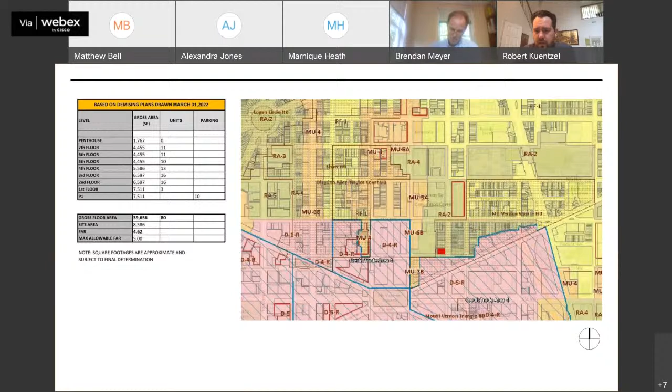The site is located in this little red square down here in the Mount Vernon Square Historic District. There was also the historic building and the non-historic additions, including the non-historic bay window addition on the corner of 6th and L.

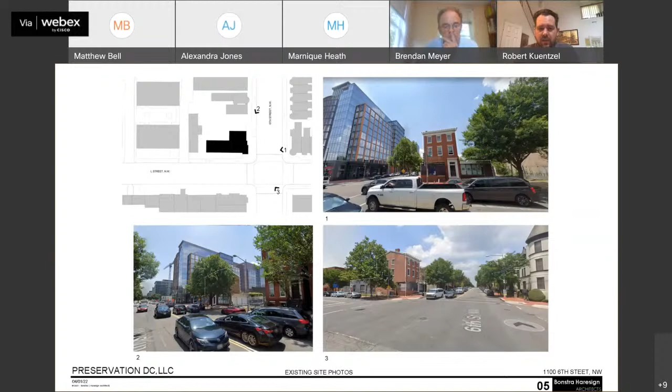Here are some pictures of the context which we were studying so that we could get a better idea of how to more seamlessly fit into and be compatible with the existing context. There's very large scale modern development just to the south with the office building across the street, as well as further down south with the 10 and 11-story apartment buildings. Further north as well as east, we have a lot of historic existing row houses.

The current state of the existing building has been cleaned up and preserved. What we will be doing is trying to take that back up to the best level possible so that we can preserve the historic building, including removing this non-historic corner bay so that we can bring it back to its original state, and removing the non-historic single-story additions here.

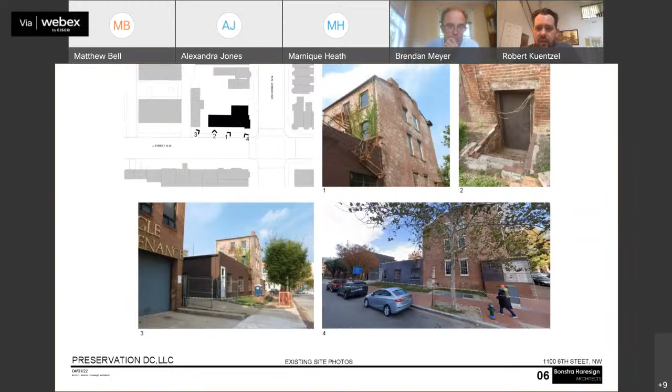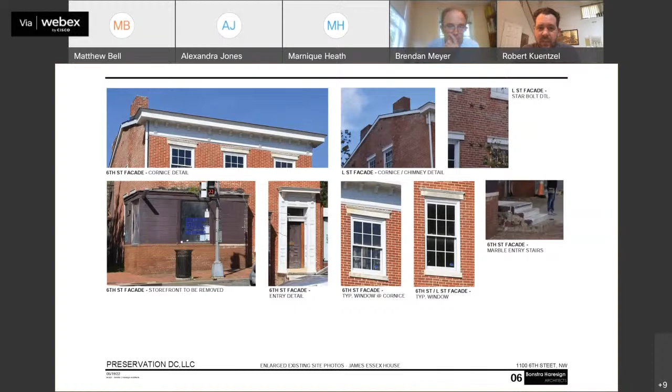Zooming in on a little bit of the details here. As Brendan mentioned, this will all be preserved and brought back to the most original state that we could bring it. The windows have been replaced, but we'll be making sure that if we need to do that again, we will be doing that. Otherwise, removing the bay here and then trying to stay back from the building just a little bit so that we can really accentuate the historic building as it was.

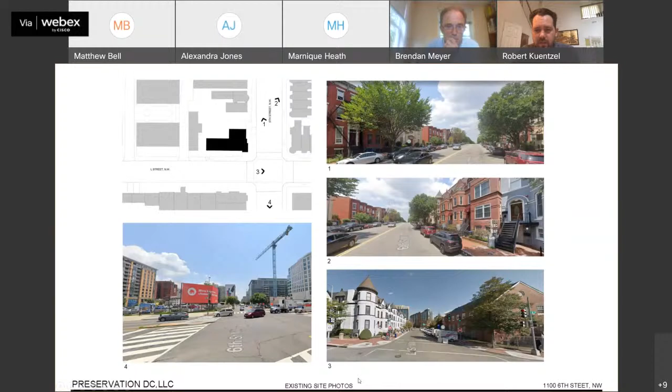A little bit more context looking further south, as well as at some of those row houses that are across the street.

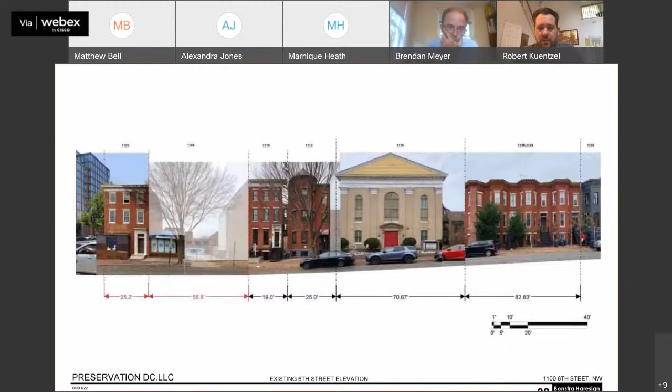Looking at the elevation here, we have the monumental scaled church just to the north, and then we can also see the larger scale buildings to the south, and then our site right in here with the taller 3-story row houses that run along 6th Street.

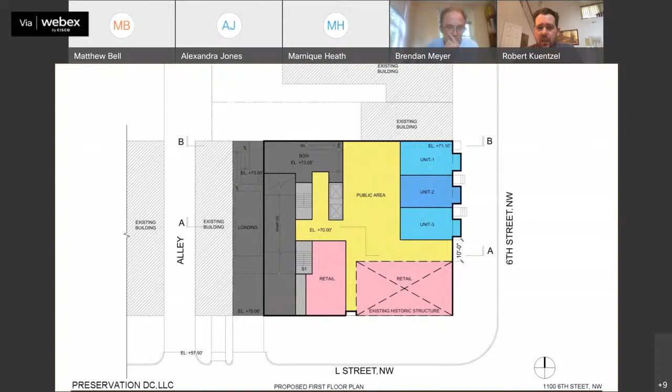The ground floor will have 3 units and then retail in the existing historic building, but otherwise will just be public area and amenities for the building here.

We'll also have a glass atrium, so that we can set back the 7-story massing of the building from the smaller scaled 4-story row house massing here, which will give it a little bit more breathing room and allow the architecture along 6th Street to sit in more seamlessly in terms of massing and context. The 7-story building will be pushed back from 6th Street so that it reads more like it's primarily on L Street, responding to the taller buildings across the street.

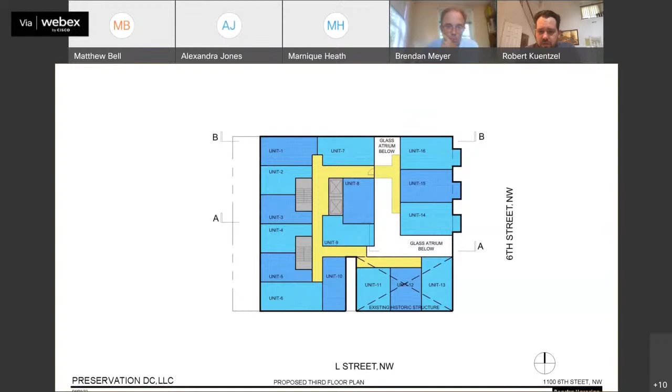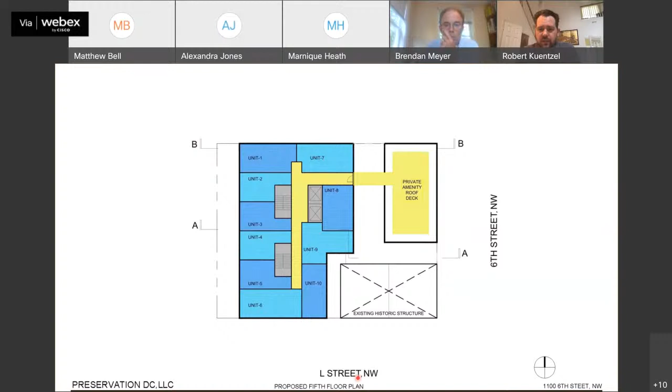We can probably just cruise through the plans here, but you can see that there's a simple connection to the historic building, and then typical floor plans up above, with a small roof deck along the 6th story or the 6th Street side. This will just be the typical floor going up the rest of the building.

And then the next, we'll just be having a mechanical penthouse up here.

So now we can look at the elevations here. We can see that the building is trying to transition both in terms of style as well as massing, because as mentioned, we have a lot of 3-story houses along 6th Street, but much taller buildings just across the street. So we're trying to go from 3 to 7 to 11 with the massing here. Since the existing buildings had taller floor to floors, we're able to put in 4 floors as opposed to 3 so that it feels like it's fitting in with the context. It's ever so slightly taller than the neighbors.

And the tower massing behind this is set back nearly 40 feet from 6th Street, so it won't really be visible if you're on that side of the street. If you're on the other side of the street, it will be visible but not overbearing.

One thing to clarify, which we did add material callouts for on the last slide, is that the 4-story row houses along 6th Street are intended to be entirely brick. The change in color at the top was to be a nod to something like a mansard, but also to change the material, which would still be brick, to the taller massing in the back, just so we can seamlessly transition between the two scales and the two architectures.

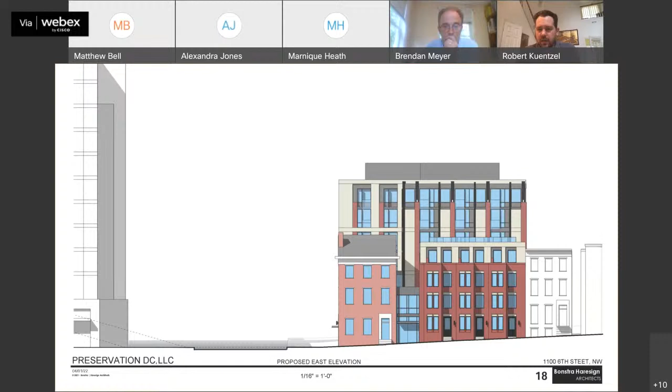And we can see the hyphen here between the existing historic building as well as the taller building. One of the reasons we wanted to set it back rather than seamlessly connect it, as it may have originally been, was because of the gable roof. Since we would be doing flat roofs here, we didn't want to connect with that in an unsavory way. So we just wanted to pull it back a little bit and let the building read as an object.

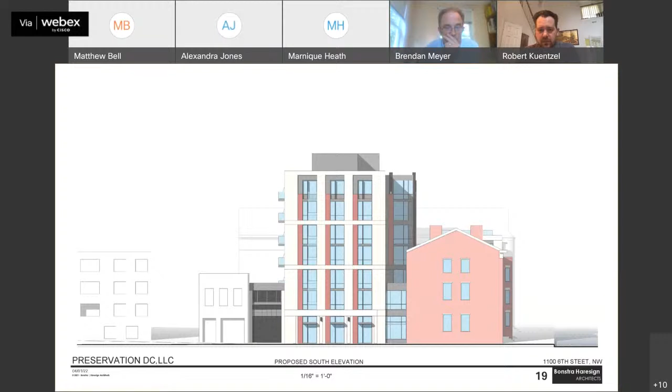So a building section through here, which again shows the setback of the 7-story building from 6th Street, as well as showing the units that would be along 6th Street, and then the lobby and atrium here. Next slide.

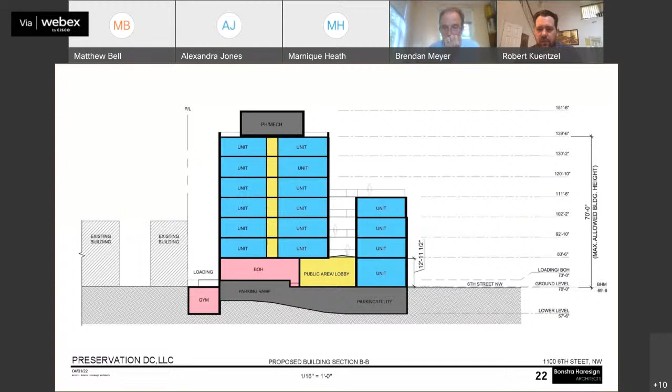And then a very similar section, but showing basically where some of the parking would go, and that there is a unit that would also be on the ground floor. Next slide.

So here's the perspective of the building, which shows how it starts to transition up. As we remember, there's an 11-story building to the left here, and then a bunch of 4-story, 3-story buildings to the right.

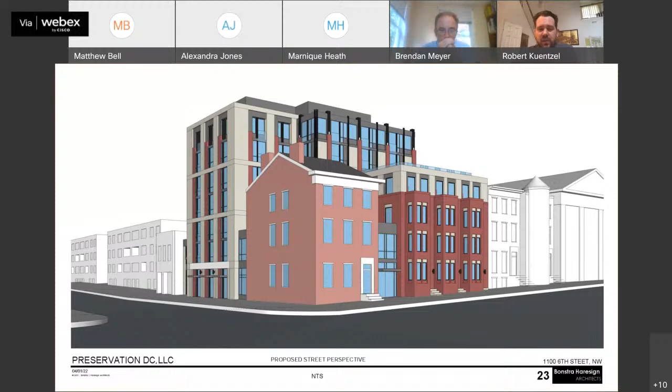So our intent here was to take the kind of simple traditional style that we have, create a quiet, simple addition to that along 6th Street with a 4-story building made entirely of brick, and then transition up in scale in terms of architecture and detailing up to a 7-story building. This piece here in the middle, the articulated eastern facade, is meant to tie together some of these geometries and proportions in a way that transitions between the two different types of architecture and the two different types of massing, so it can seamlessly fit in both with its direct neighbors as well as in terms of a larger context with the neighborhood.

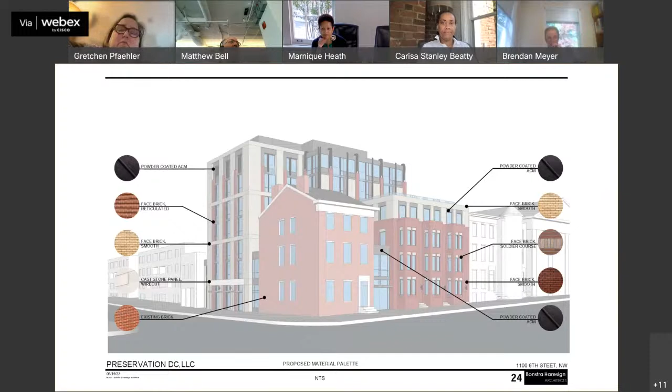Thank you. So the motion with the amendment to add that we're asking for particular focus on the 7-story connector piece. Any further discussion? All those in favor of the motion signify by saying aye. Aye. Anyone opposed? All right, great. Well, thank you for this, it's a nice project. Thank you.

Right, we're ready for our next application at 227 to 239 Massachusetts Avenue Northeast in the Capitol Hill Historic District.

Madam Chair, I will be leaving and I will return. Okay, excellent. Thank you for letting us know. We'll see you shortly.

Is staff ready to present? Madam Chair, this is Tim Dennee. I'm not the usual Capitol Hill staff. I don't know if Moira is available, but I will take over. Perhaps we should have the presentation first, and then I could just make a few remarks.

Okay. Is the applicant ready? Are you ready to make your presentation? Yes, good morning. My name is Zach Williams. I'm a land use attorney with Venable, representing the applicant today, along with our architects, Alice Arn and Roland Munoz. I'm here just to provide a quick introduction before turning it over to the architects.

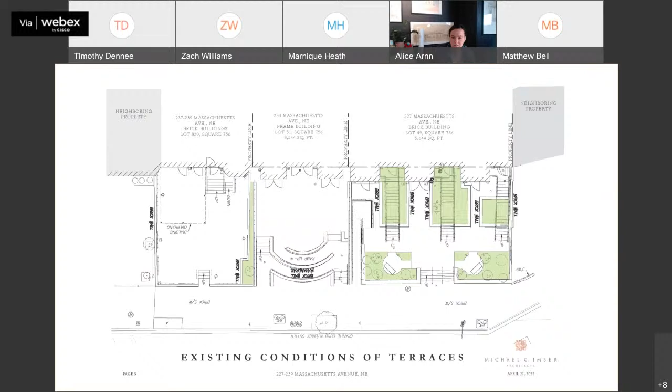So just to give some context on dates, the rightmost building, the brick building, is 1892. The siding, the blue siding building, those are 1850s, 1852 I believe. And then the two brick buildings are both early 1900s.

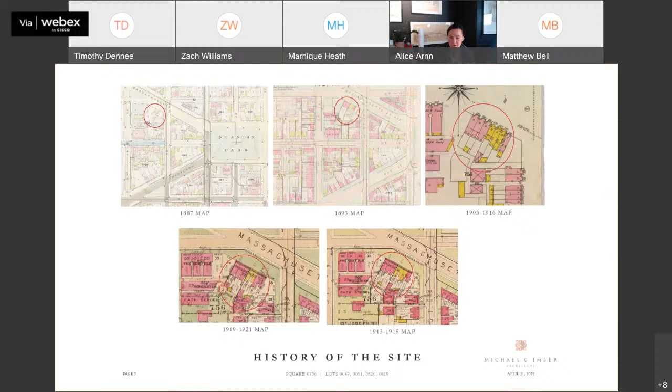Neighboring context: we're right next door to the Union Pub and the condo building behind it. Across the street is the Heritage Foundation and those related buildings. And then on the other side, next door, is that small corner market.

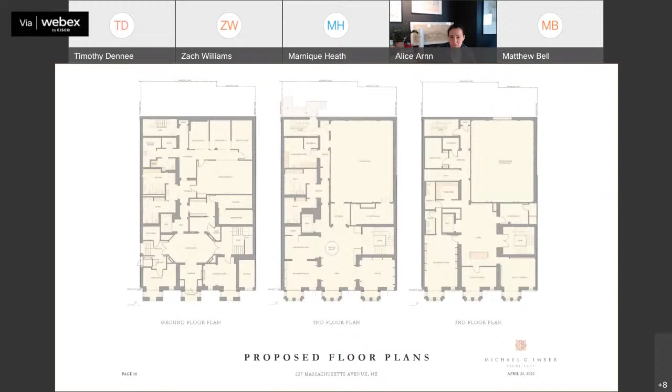So I'm going to start with the fourth floor addition. This is the plan we propose for the fourth floor. Currently, the fourth floor ends where that shading begins on the new massing, and we're proposing that shaded area, which is about 1,000 square feet.

It's intended to be library space. It'll be a more formal library than they have now, used for dissertation defenses, important academic receptions, and housing the college's pretty extensive library, a lot of which is in storage right now in Washington. There will also be some rare books displayed in the room.

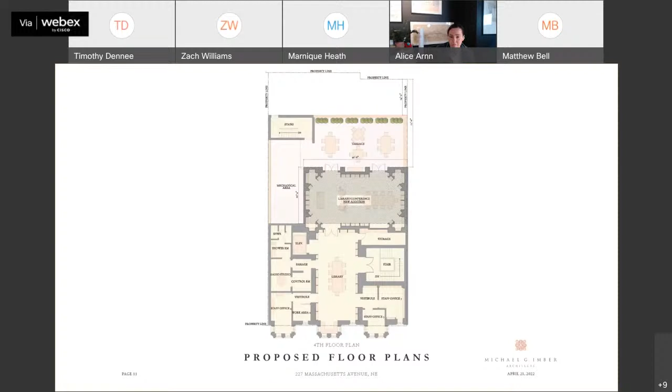I should say too that the mechanical area next to that addition is existing, as is the stair mass. So in section, we're proposing really just extending the massing of the fourth floor back towards the alley side of the building.

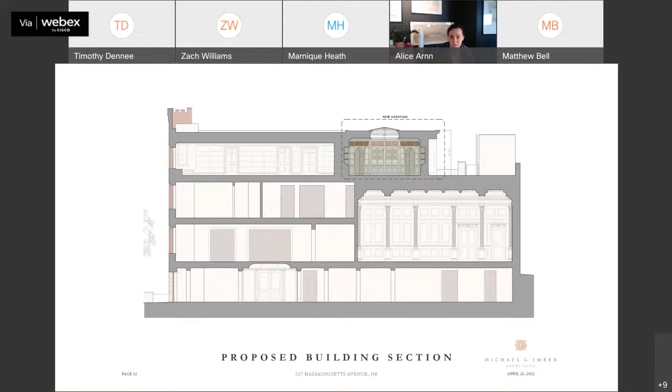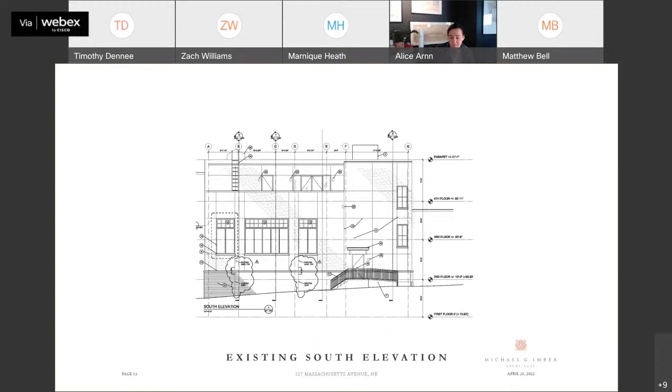So to the right behind that screen, that's a mechanical area, a large door opening to the existing library space of the building, some storage, and then a ladder up to the higher roof level. Part of this is used as a patio right now, and the rest is just gravel fill, separated with a railing.

So this is the proposed rear elevation. We do have a parapet coming in front of the facade we're proposing, but this kind of gives context. Much of this is existing.

This is the proposal for the rear elevation at that terrace. It's really meant to just be a backdrop for a small outdoor space, keeping the materials really simple, just with plaster to match what's up there already. And then articulating with a really simple cornice and pilasters.

Really just utilitarian, to shed rain and break up the facade and create some really simple surrounds around those doors.

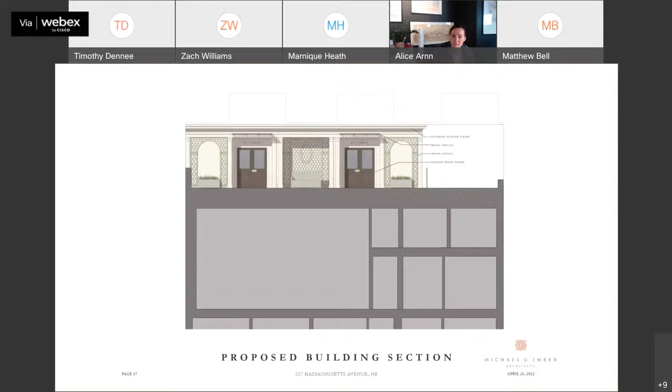The other potential view is in front of the rectory at St. Joseph's. I think you would be able to catch a view, except that there are some really large canopied old trees right there, and you're looking through a pretty narrow area between buildings. So I think it's essentially invisible from all of the street sides.

We've been in touch with all the neighbors and obviously the ANC on this, and notified them and talked with them. We have several letters of support as well.

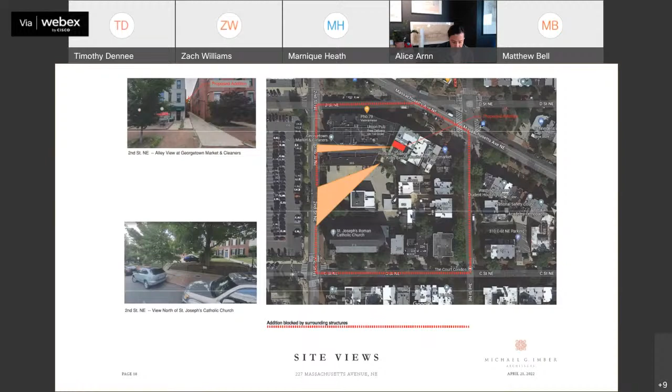So moving on to the facade improvements at 227, that 1892 brick building. This building, it's obviously, I think you can tell in this view, and if you've seen it in person, it's a real gem along Massachusetts, especially the upper 3 stories which are in really good shape and well preserved. There's some really beautiful brickwork.

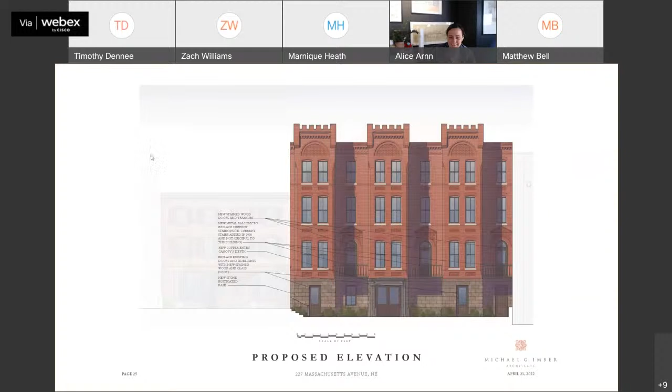Before we take questions, Tim, is there anything you'd like to add in reference to the staff report? If Moira provided the report. Actually, I'm so sorry, I think we have a little bit more on the plaza that I need to get through. Oh, you do? I stopped there and I shouldn't have. Okay, all right, well we'll finish that and then we'll hear from staff. So sorry, sorry for the pause. No worries, so just a couple more slides.

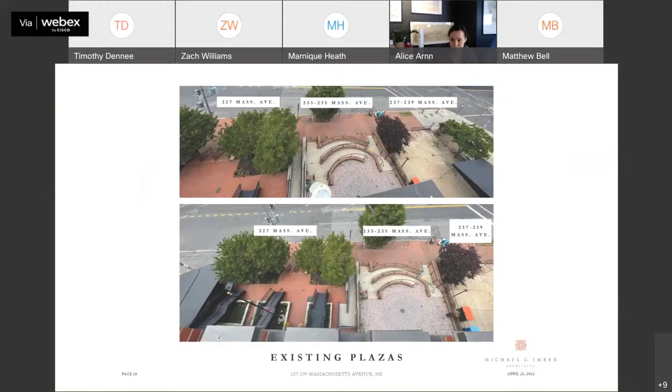And then obviously incorporating a lot more green space. This is something we've worked with ANC on and the historic preservation staff pretty carefully, and tried to balance the circulation needs and really take advantage of the fact that we can create connections and reduce the amount of ramping on the site. But also address the kind of needs of the neighborhood and really improving the site - it's very paved and not in great shape right now. So we're hoping these are improvements that benefit the neighborhood as well.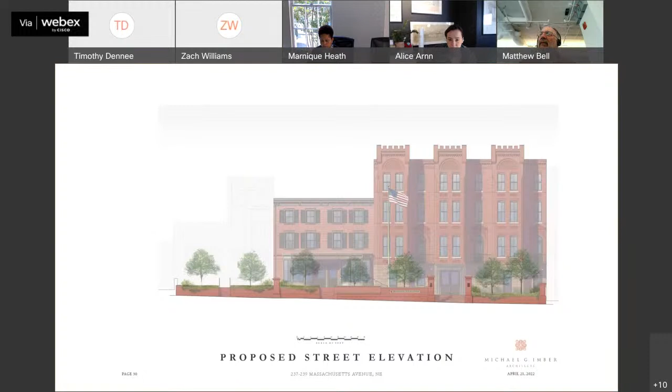How high is the wall relative to the human being at the highest point? I could ask the architect that. Looking at the elevation we're looking at, I think the highest point is in front of the center building, the graduate school building, which is 233, 235, the siding building - I think that's about 36 to 42 inches.

From the sidewalk or from the terrace on the inside? Let me zoom in quickly. There is a ramp in front of - it looks taller than that. I don't have the exact number, it might be 42 or 48. I'm sorry, I don't have that number.

If you were to count the risers on the entrance, that makes up most of that height - that's got to be, what, 1, 2, 3, 4, 5, 6 risers at 7 inches or so. Yeah, so 42, or a little bit around there. So that's taking you not much above the plinth of the piers.

Tim, are you saying that this right-hand side is really what you're trying to get after? What I'm saying is look at every wall that's in the public space and see to what extent you could lower it while just having a gentle slope on the planter box behind it.

Would it be helpful? Can I ask one other question? Yeah, let's go to the plan. Can we go to the existing image of the site conditions? There's a good plan that's got existing plaza and proposed plaza - it's page 26, I think, at least. That's right there, that's it, yeah.

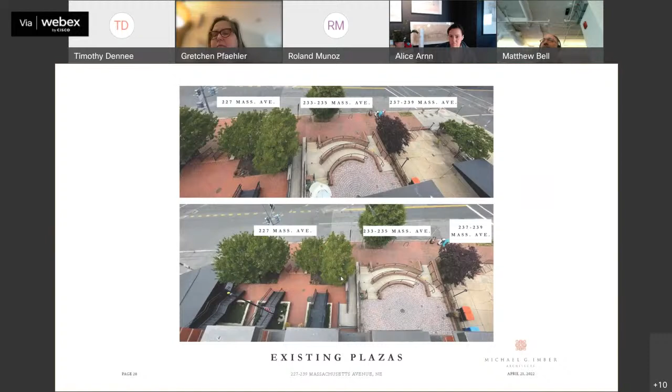You're right. I think one of the things we're trying to do is conservatively maintain the existing grade there. If you go back another slide, you can see contextually what we're really looking at here. So right there, that is our terrace elevation, and those are our site walls. You can see the graduate school at the bottom right, that's the height we're looking at. So we were just trying to maintain that without regrading the whole terrace.

But Tim, are you saying you would like us to terrace the grading from the front of the building to the street? I was saying sloping.

If you go to the site plan, the proposed site plan, there you go. You'll see that in almost all cases you have a considerable depth of the planted area, and so that allows you to sort of gently slope down, not to a point where you've got a steep slope and really have to worry about retaining the soil, but just enough to lower the wall and reveal the plantings to somebody walking by.

So Tim, if we had where you see the back wall of the ramp... Yeah, sorry, I'm addressing the board right now. I don't really suggest a recipe for fixing each area. That's just the general point, and I apologize for not having been more articulate about it.

But the idea, yes, I think that some of the piers are sort of random. They appear to be signals of where corners are, but that's kind of unnecessary to put this imprint of this building out in the public realm. And we understand the idea of signaling the entrance, so piers there, maybe not as tall, but piers there seem fine.

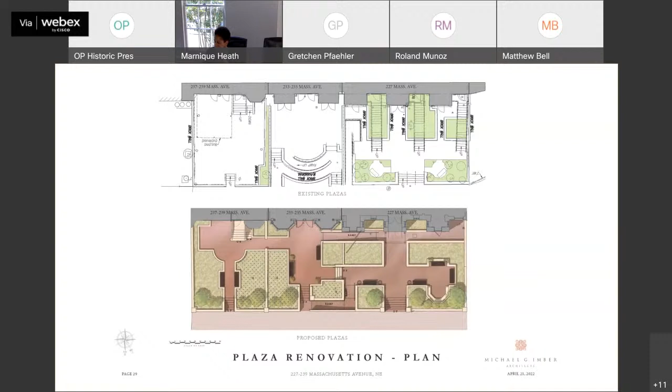All right, so any final questions from the board? All right. Then now would be an opportunity for the applicant to make any closing statement if you'd like, before the board deliberates.

Okay. Thank you. I think we appreciate your comments and the discussion. Okay, great, thank you. All right, so would anyone like to start deliberation on this?

It seems like most of the discussion has focused on the entry stairs, stoops, and the courtyard space, this front space.

One question that I'm not sure was asked, and this is to the applicant, have you all not gone to public space yet, correct?

We've done a PDRM with the DDOT staff and gotten their preliminary feedback, but it's been indicated to us that that will happen as a part of the permit process. So once we submit for permit, we'll do a public space hearing. Okay, all right.

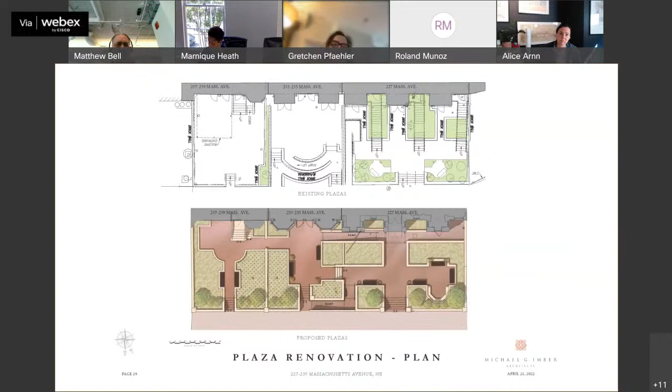If the plazas and the spaces outside were configured a little more succinctly and clearly, I think the elevation with the new entrance is nicely done. The two windows on either side that Mr. Dennee was talking about at the base seem a little overly modern, in that they're just simple cuts, and I wonder if there's more detail that ought to be supplied around those ground level windows to be in character with a row house of this type. So I'm sympathetic to the facade proposal.

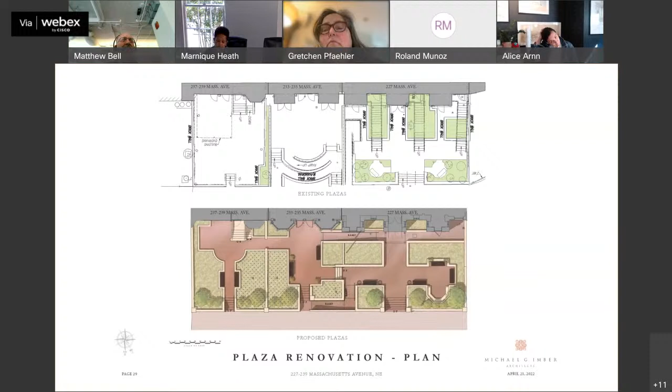As for the plaza outside, I think it's possible to do something with more grass in the areas of 237 and 233, and make those relate more to those buildings. Maybe make 227, since it's the main entrance now, have a little less grass and a little more plaza, to create an individual distinction for each of those yards, matching each of the individual townhouses as they historically evolved.

The height along the wall on Massachusetts Avenue, I have no problem with the piers and things. I think the visibility could be studied, and maybe some exhibits could be created to help us understand exactly where eye level is and things, to engage the public realm.

It would be nice - there are walled gardens in this city that have nice gateways that people go into. I'm thinking of the one right by the old Columbia Historical Society.

I know it's not on Capitol Hill, so Gretchen's going to jump on me and say it's not on Capitol Hill - go here, I'm talking about compatibility with the Capitol Hill Historic District. I understand. Gotcha, I'm trying to just preempt you there, that's all. Fair enough. No, but I think that's something to be considered.

I do think the visibility into this is important, and I think a wall is important as well. Maybe some further consideration of the height of it, and maybe some way in which the landscape green could roll up the grade a little bit could help, but I think there's probably a little bit of study there that could happen. I think a wall there does provide a sense of boundary and a space that, while not 100% public, certainly is part of the visual field of the public realm. As this institution presents itself to the street, that's important, and I think it's something that could be improved upon.

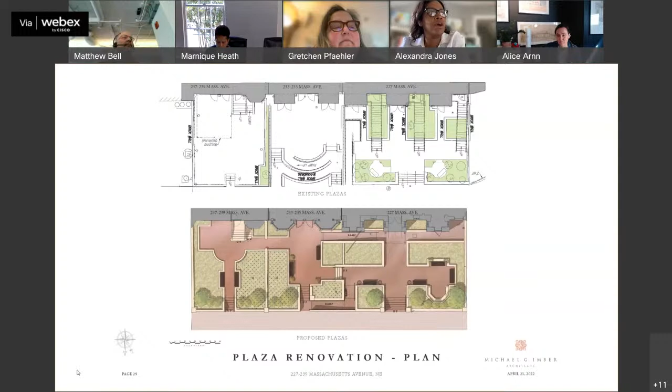Matt, I'm kind of opposite of you. I definitely feel like it reads too much like one unified building and not three separate townhomes. I know that's kind of the point of this proposal, but I also think that ends up being problematic. I don't know if there's a creative way to reduce the stairs, I'm not sure what can be done, but I do think it still needs to read as three individual townhomes versus one independent building, because it takes away from it. Looking at page 27, I kind of get that. I like the idea of creating the courtyard, I like the idea of unifying all of the spaces together, but I still feel like the three buildings need to maintain that aspect, so that they read as individual homes that are being pulled together to create this one cohesive piece.

All right, any other thoughts? The only other thing I'd add, so it's not unspoken about - I don't have any problem with the addition on the fourth floor. I think it's a good solution, it's not visible or minimally visible, so I'm fine with that. I think it's a creative solution.

Yeah, I was going to ask that question because no one had mentioned it, and I assumed that meant we were all fine with that. So, any other thoughts anyone has?

If there are no others, then I will make a motion that we approve the fourth floor roof deck and rooftop addition, and ask that the applicant work with staff to address the comments from the board today on the facade improvements, entries to the residential buildings, the stairs, the plaza, and generally support the board's strong feeling that the individual character of the residential buildings needs to remain.

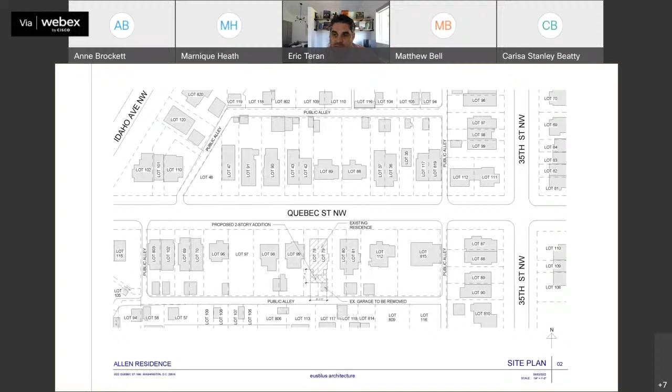As staff just reported, we've worked for the last 2 or 3 months with the neighbors, ANC, and HPO to get something more compatible. We originally started with about a 28-foot addition, and we've come back down to 21 feet. As you can see on this first slide, this is lot 18 and 19, and we're proposing that 21 feet, coming in 6 inches on each side.

Can you go to the next slide, please? This is the existing basement, where we're adding a new bonus recreation room. Next slide, please. This is basically the same floor plate as the basement, where we're adding 21 feet to the back. You can see the 6-inch indentions on each side to separate it from the existing structure, just opening up that area.

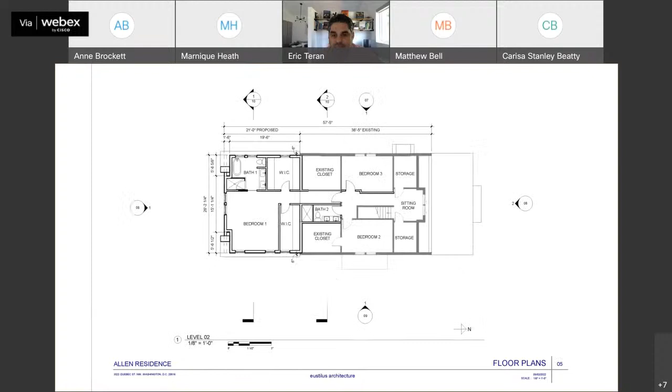Next slide, please. Oh, go back one more, please. There you go. This is the new second floor, where we're proposing the primary suite will be located. As you can see, the first half of the existing is staying almost as is, except we're adding a corridor to get back to bedroom number 1 and adding a bath 2 for the 2 front bedrooms.

Next slide, please. This is the roof plan. We were able to get the new roof to be, I think, 4 inches lower than the existing gable, just to give it that separation.

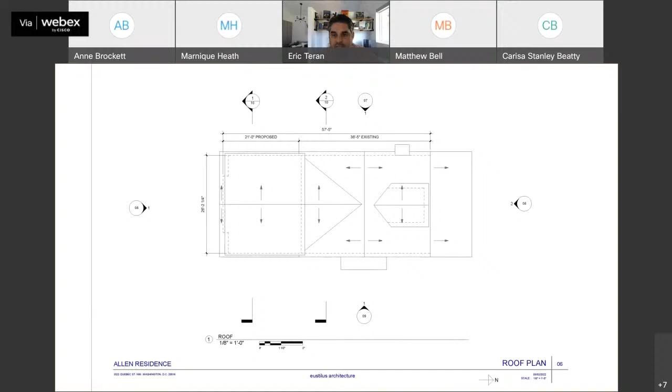This is the side elevation where the existing is to the right and the new is to the left. It's very similar to the facade on the other side, on the east elevation. We're changing the windows there, you can see in the middle, where we're going to put new windows in the existing bump out, just to make it feel more like a sunroom. It's not visible from the street, and there is already vegetation that blocks it from the neighbor's house.

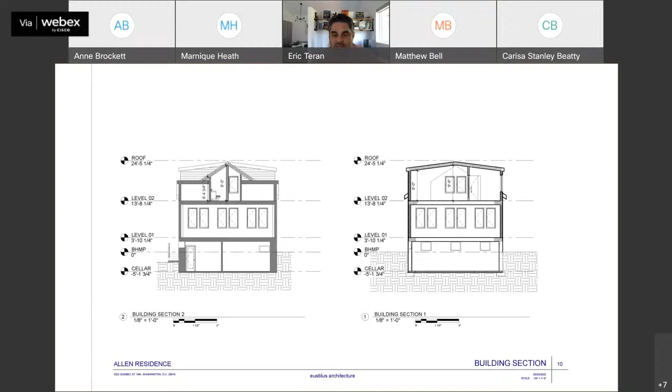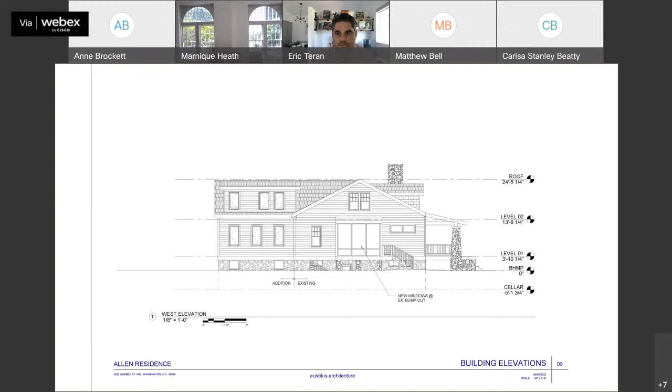In the review process, the integrity of the evidentiary record also matters. The DC Advisory Neighborhood Commission's resolution to move this case forward to the HPRB was based on an incomplete record that gave a misimpression of the amount and nature of support for the addition. The resolution referenced 1 letter of conditional support and 10 additional letters of support from neighbors. These documents were not distributed to the ANC commissioners for review prior to a vote, and they weren't included in the record of the proceedings.

Most of those letters were actually short emails that simply expressed general support for the concept of an addition. This collection of emails did not include the homeowner's originating email request and thus lacked important context regarding the question posed to the neighbors. And at least 3 of those neighbors were not aware that their informal emails would be submitted to support a historic review application. They had interpreted the homeowner's originating email as just a courtesy note about planned construction.

Notably, a neighbor across the street who had responded to a second request from the homeowners and described to them the benefits of their own 4-foot addition, detailed the importance of considering the impact of a large addition on the immediately adjacent homes. She had thought that her letter would be submitted to the ANC reviewing officials, but it was not among those reviewed by the moving commissioner.

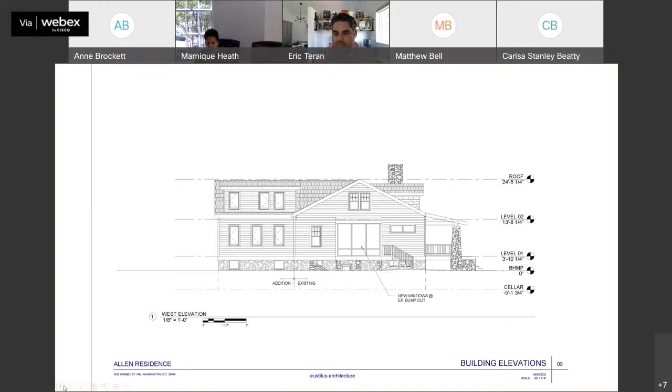And what would be your thought on reducing? I wasn't sure that the rear roof would need to be manipulated on the existing house just to remove 5 feet of the addition. But what's your thought there? If you could go back to the second floor plan, I think it's page 7 or 6.

I would say, since this question is directed to me, yes, thanks. The addition has already been reduced and the interior space has already been pulled in from, I believe, 28 feet initially. Staff 100% feels that this is a compatible addition. It is typical of board approvals throughout Cleveland Park. We do not feel it overwhelms the existing house or the site. It's certainly within what is allowable.

So I would not suggest redesigning from the dais in terms of the number of feet, but voting on the issue before you. And if that vote comes back that it needs to be resubmitted, then that would be the next step. Okay, thank you. Questions from the board? Any questions? Okay, seems we're ready to deliberate.

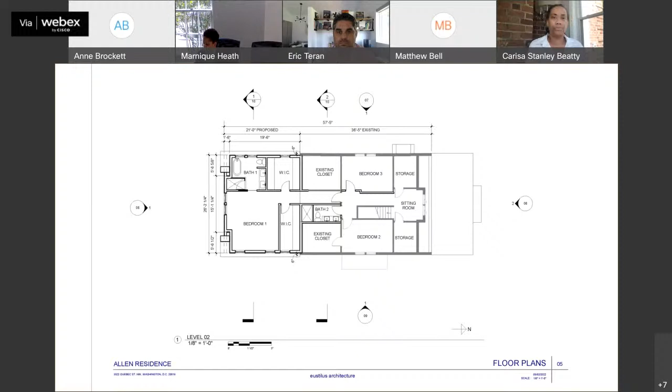We want to turn cameras back on. I see most have their cameras on. I think Ms. Johnson has made some compelling requests here, but the reason I asked staff, given that the applicant has already reduced this addition pretty significantly, I would be in support of the staff report and what we've heard from Anne today, to maintain this addition at its current 21-foot depth. Does anybody have any additional thoughts on that? Disagreement?

I'm in agreement with you, Madam Chair. Okay, then I will make a motion that we approve the proposed addition at 21 feet, and ask for a second. Second. Any further discussion? All those in favor signify by saying aye. Aye. Aye. Anyone opposed? Okay, then the motion carries.

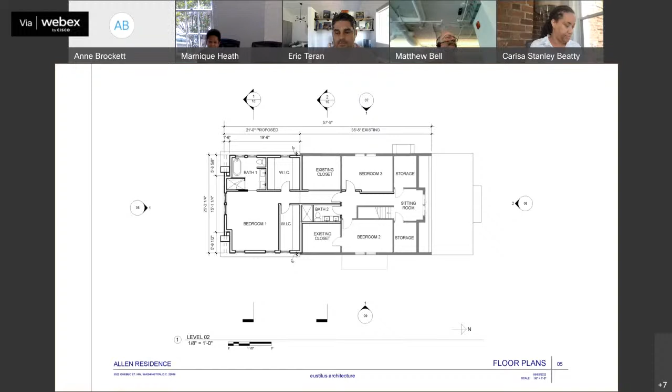We are ready to proceed with our last case of the day in the DuPont Circle Historic District at 1322 to 1326 18th Street. This is coming back to the board for another review. I'll allow staff to make your presentation, unless you'd like to start with the applicant. I would be happy to go first, Madam Chair. If we could just go to the next slide, just so the board knows which project this is. Yeah, and you'll probably remember it.

This is a project that you reviewed in March of this year, and at that time you asked the applicant to consider ways to reduce the visibility or disguise the addition proposed as a 5th and 6th floor on this set of 3 contiguous row houses. The proposal responds by adding a mansard roof as a method to camouflage the addition. This does lower the point at which the roof form springs off of the addition, but it actually raises the height of the addition, so the overall visibility has been increased. In the HPO's opinion, this does not improve the design's compatibility with the historic buildings.

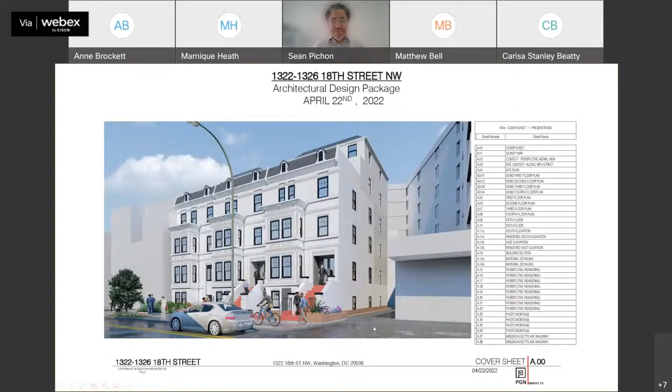Just to remind you guys, this is along 18th Street, where our building sits in context with a number of similarly sized buildings. Then it transitions to a commercial corridor along Massachusetts Avenue, where there are 8-story plus buildings, setting a scale that is very different from the context along 18th Street. I'd also like to remind the board that we presented to both the ANC and the DuPont Conservancy, and we received full support for our proposed addition as is.

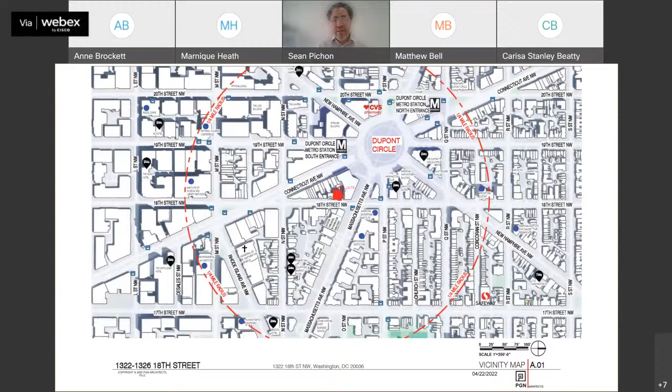Again, this is showing the buildings in context. As I mentioned, the buildings along 18th Street are similar in size to the existing three row houses, and it transitions to the larger buildings along Mass Avenue. This is just showing more context, we can go through these pretty quickly.

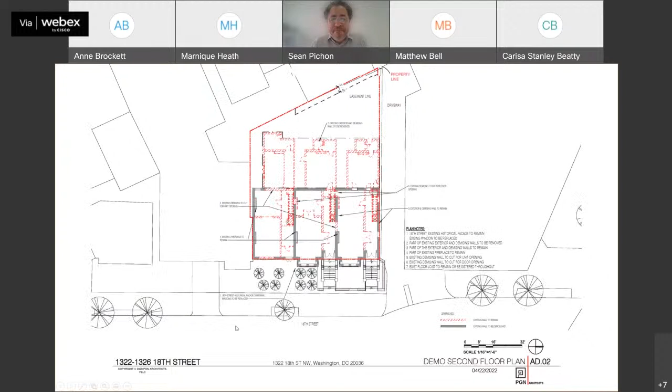We're preserving the majority of the existing row houses, all of the structural walls. We are punching through at a couple of areas to add some connectivity to the addition, but the majority of the walls are being retained, and we're adding an additional bay projection that was formerly removed, and a dormer to the roof.

So these are the floor plan and additions. As you can see, we're adding in a number of units and some vertical circulation, 2 stairs and an elevator.

Once we get to the addition at the 5th floor, it is set back from the facade of the existing row houses, including a green space out in front of the addition. Then at the 6th floor, the front of the building steps back even further, and this is where we begin to introduce the mansard roof.

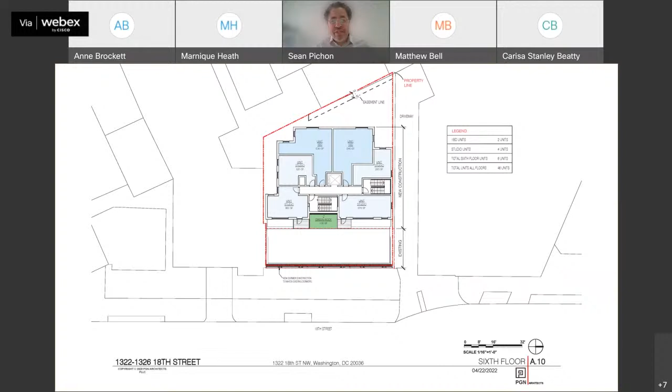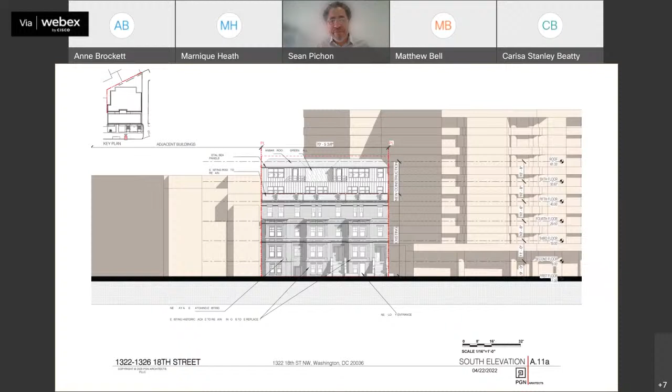So in elevation, materiality, we selected materials that would blend with the existing buildings. The existing buildings will be painted in a white color, the brick, and the materials being added to the addition are also in a lighter color to help the addition disappear from the elevation.

Here at the side elevation, this is where you can see the mansard roof that was continued around from the front to the side towards the back, allowing us to transition that corner. Previously what we had was a pretty sharp edge that didn't have a transition around to the side elevation. So here, this mansard continuing around to the side improves the massing of the building as it turns to go back towards the rear.

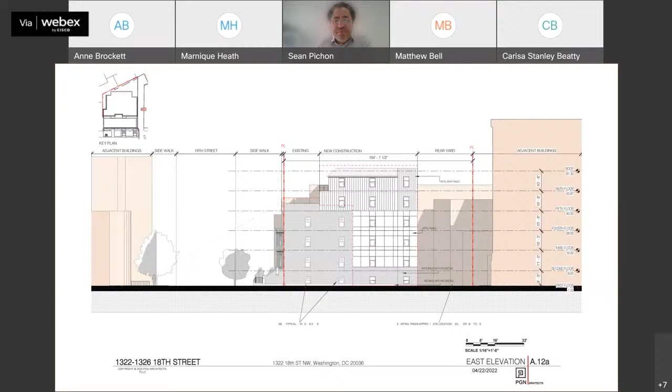This is just showing it at the same elevation and color. Next slide.

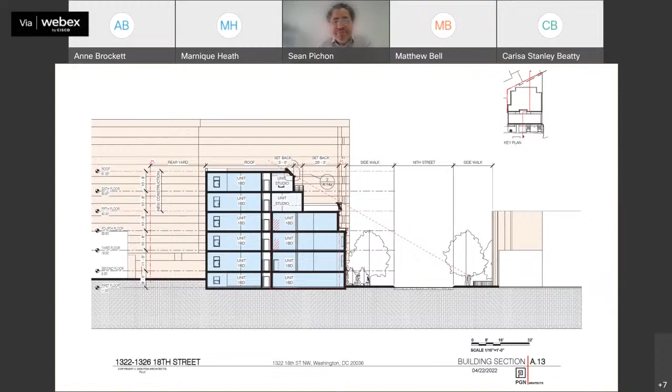From the sight lines, you can see that we originally started with the mansard at the top of the building as a way to reduce the visibility of the 6th floor addition when seen from across 18th Street. So this sight line shows why that mansard, and the nature of its shape and scale, were derived.

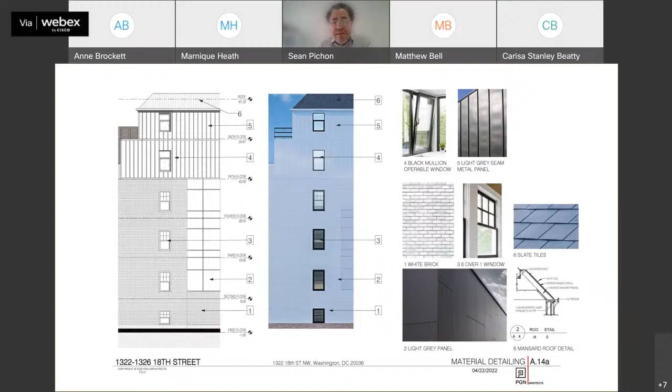The building materials are similar to what we presented before. I won't go through all the materials in detail, but we did add a detail of the proposed mansard roof and cornice, as seen in the lower right-hand corner.

So we have a series of renderings that we have done to depict the building in context. Along 18th Street, as we went through last time, there are several buildings of similar scale. From this vantage point, the 6th floor addition is minimally visible from across 18th Street.

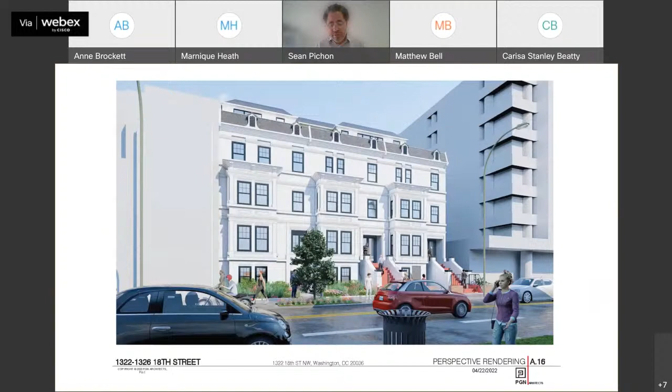Again, this is looking as we're proceeding up 18th Street. Looking at the building from the front, you can see the mansard roofs and the effect they have in helping to reduce the impact of that 6th floor addition from this vantage point.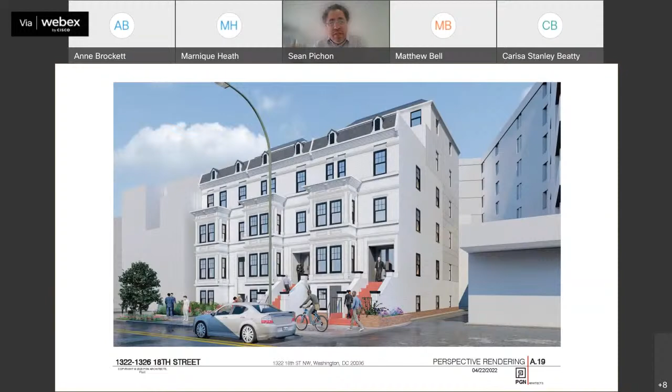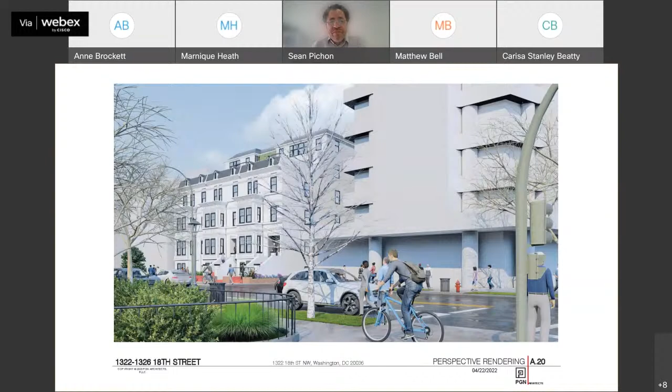Then as you go towards Mass Avenue, there is a vantage point from Mass Avenue, between the existing buildings, where the buildings are visible and the addition is visible. We did a couple of photo montages.

One of the concerns we heard last time was that some of the modeling of the existing buildings was not as detailed, and not showing true vantage points.

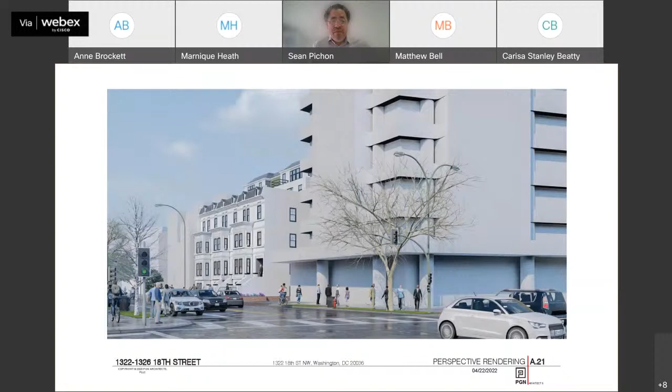So we've updated that massing, and we've also created some photo montages that show it in true context.

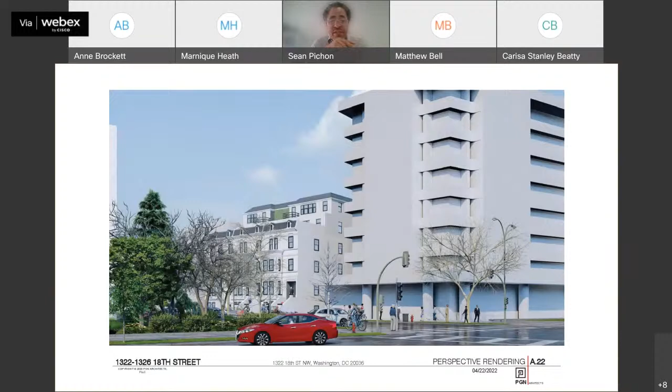Here's the first vantage point from the corner of Mass and 18th Street, and you can see the 8-story commercial building in the foreground, and our building with the addition in the background. From this point, we're approximately 150 feet away from our building along Mass Avenue.

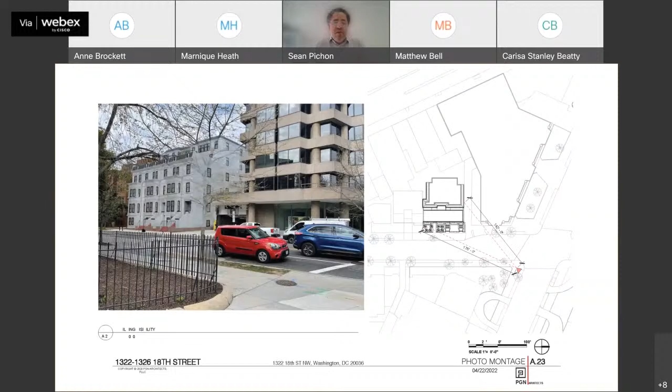Another vantage point from the sidewalks on Mass Avenue, looking back towards our building and its visibility, again in context with the 8-story commercial building.

Then across Mass Avenue at 18th Street, the visibility of the addition begins to get blocked almost entirely by the adjacent commercial building.

This is a viewpoint from across Mass Avenue, further back, where the visibility is there. We're approximately 250 feet away from our building, but you can see the visibility of the 6th floor addition, stressing the context of its adjacency to the 8-story commercial building.

We looked at the compatibility of that massing adjacent to the 8-story commercial building, and the addition of the mansard roof allows us to soften the edge at the top of our addition, to blend a little more into the skyline, as opposed to what we had previously, which was a very sharp edge. That mansard helps us transition from the vertical to the horizontal.

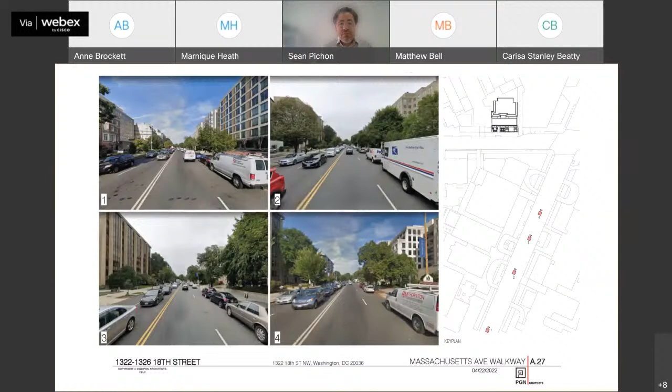At a certain point, right before you get to 18th Street, there's a transition, an opening and aperture that allows some visibility of the buildings along 18th Street. But from this vantage point, you're contextually looking at a commercial corridor, and the buildings towards the rear of that corridor sit at a much lower scale in context to the 8-story commercial building wall along Mass Avenue.

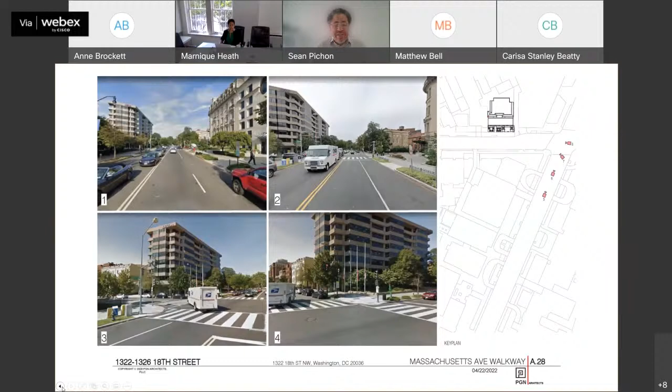Thank you, that concludes our presentation. I did want to add that we focus on the transition of the 6th floor addition as our primary focus. We did study a number of different options when looking at it from the Mass Avenue vantage point.

There were several options that we looked at, and to be quite honest, the options of changing either the shape or massing of that sixth floor — none of those options really presented an improvement to what we thought was already a pretty decent massing in context with the 8-story buildings along Mass Avenue.

So what we're presenting today is a compromise of the top massing being adjusted to allow for a transition from the vertical to the horizontal. We did also respond to the addition or change of the window treatments to a 6/1 window treatment, and we've made sure that we have some very accurate photo montages that present this in context. We would like to hear from the board your thoughts and opinions about our presentation and where we stand now.

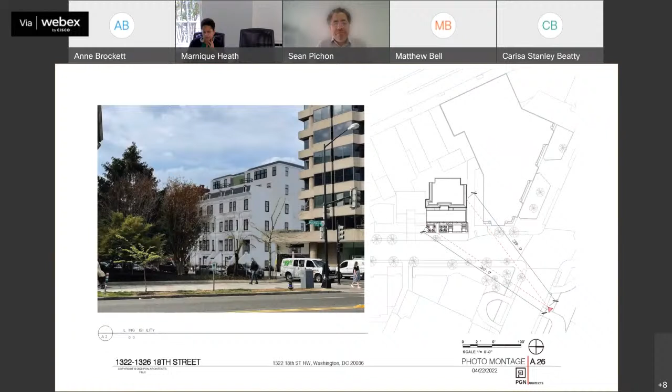Any other questions? Chair Heath, yes, if you and perhaps Gretchen.

I'm returning, so I apologize for missing most of it. But I heard your question, Chair, about the proximity to a building that is out of character for 18th Street, and not necessarily understanding the reason why a 6th floor would not be supported. Could you just say a little bit more about the response from that?

Did that satisfy your question as to why it would not be supported? It did, it satisfied mine. Did you need more? Did you need to have more of an explanation of that?

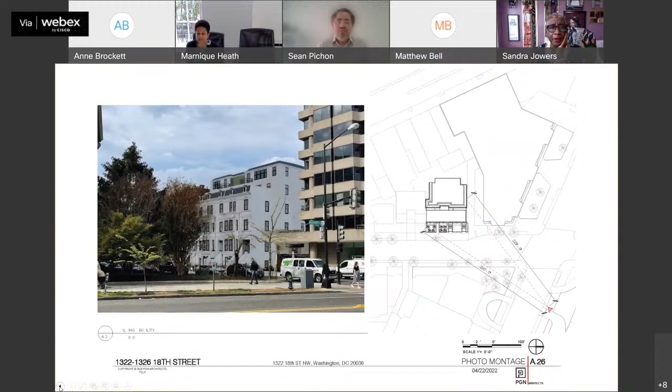What I heard from Anne was that the scale and character of Massachusetts Avenue is much different than 18th Street, and that allows the building on Mass Ave that this backs up to be of the scale that it is. So rather than look at its neighbor and the mass of that building next to this one, staff is really looking at the character and scale of 18th Street and the context of this building to its neighbors along 18th, which should respond to the scale of this street, not to Massachusetts Avenue. Does that make sense?

That provides the clarity that I needed. Thank you. Okay, perfect. All right. Any other questions?

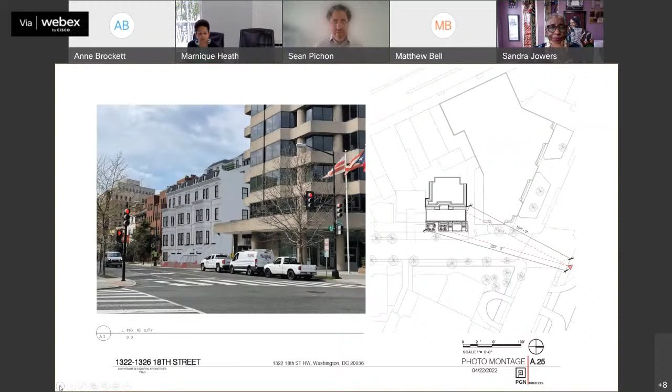All right, then I think we're ready to deliberate on this. Do any board members—I think the issue before us right now is this 5th floor versus 6th floor question, and I'm curious if any board members disagree with staff's position here.

Right, I hear no disagreement. I don't, Chair Heath, I don't disagree. I'll be positive, I agree with staff's position. And I didn't hear anything in the testimony or see anything in the materials that were provided, largely because they were consistent. I agree with staff's position about the mansard roof.

Okay, all right. I will make a motion that we support the staff report. I'll second that. So there's been a second. Any further discussion? All those in favor signify by saying aye. Aye. Aye. Anyone opposed? Okay, then the motion carries.

Thank you, Mr. Pichon. I'm sorry, I thought I was going to get a chance to speak again. Oh, well, there wasn't anything for you to rebut, but normally we would have given you a chance to rebut any testimony. I'm not sure if that will change the board's position, but you're more than welcome to add a final comment if you'd like.